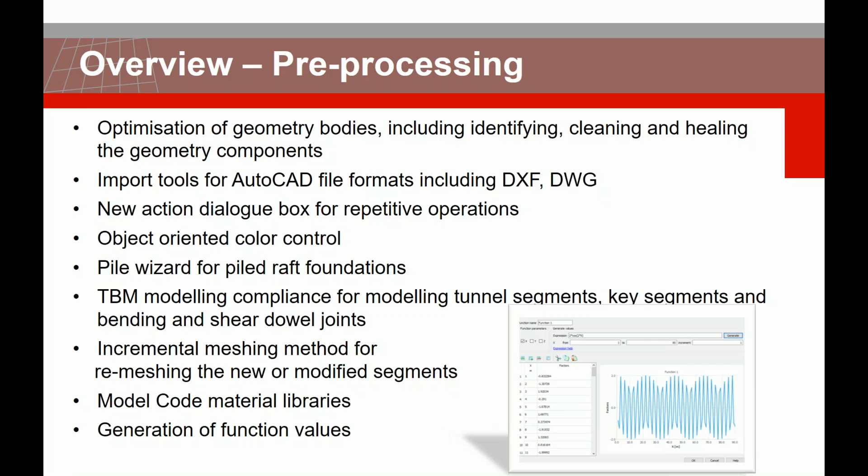The model code material library has been extended and made more interactive in terms of the definitions. The function values dialog box that we had for the definition of values and corresponding functions has now become more interactive, with some predefined arithmetic functions and other predefined settings.

With respect to the kernel, we have many developments; this is basically just the tip of the iceberg. I can briefly mention here the new work procedure for the definition of construction stages. This is very in line and very straightforward, especially with geotechnical applications, in order to easily define the model.

In order to easily define the model, control the sequence of construction stage, the active parts, the deactive parts, and also with respect to variation of the water level, change of the phreatic surface. Mixture analysis also, we optimized the implementation that we had in Diana in order to make it more interactive and easy to use by everyone to be able to perform the coupled flow stress analysis.

For those who are dealing with the dynamic analysis, we have a new feature that helps to convert the distributed loads to the basic dynamic mass. The hydrostatic load we incorporated with the time function. That means you can now nicely combine with one operation the impounding and dewatering process in time and the impact and effect of that on a hydrostatic load.

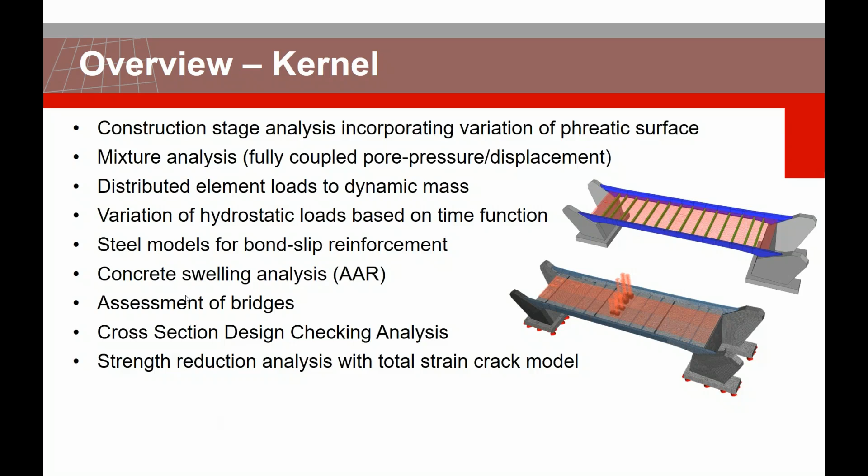And also with respect to the post-processing, we have enhanced the speed of the data management, the representation of them, plus for different type of output, we have added additional output parameters like over-consolidation ratio, maximum shear strain, hydraulic gradient, and so on and so forth, that you can find more in detail from our documentation, but also I touch base on some of them during this webinar.

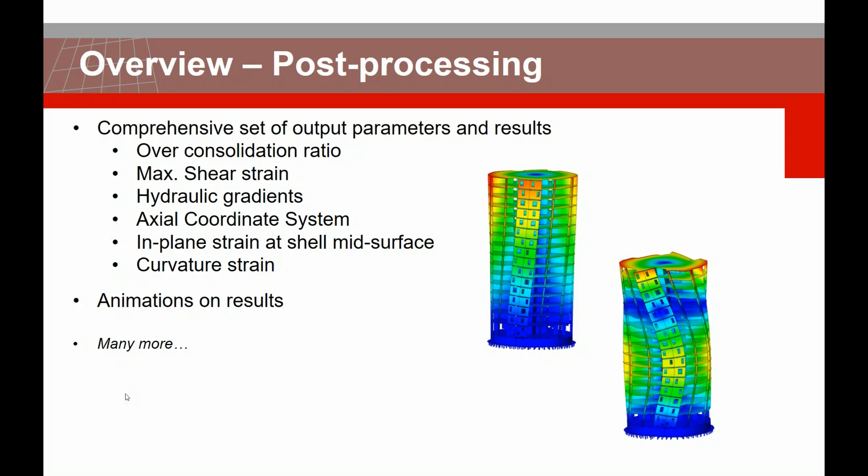So let's start with the healing process. We have incorporated one of the latest technology and the solutions offered in conjunction with Parasolid, this body shop, and we incorporated that in Diana along with our Parasolid engine for modeling to be compatible and very efficient and optimized in terms of the model definition and workability in the Diana environment,

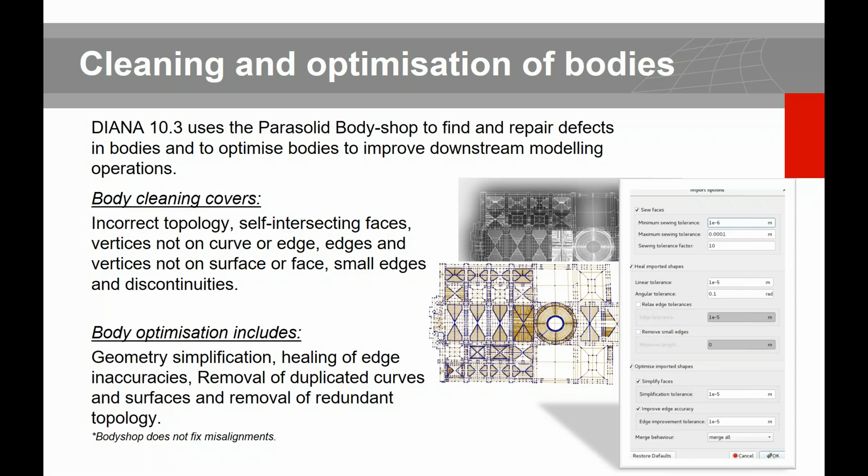For AutoCAD or import of DXF and DWG, similar to other features that we have, STEP, IGS, DXF, DWG, and IFC. You can import DXF and DWG, and our import feature covers all the earlier versions from release 14 (1997) up to now. And also all the geometry entities can be imported. However, you need to be aware that if you have some entities like text, hatch, light, these are not imported in your Diana model, because they don't have any structural value. They are just

drawing and explanation entities. Another thing that you have is the layers in the AutoCAD model, and you can import AutoCAD layers based on the various shapes that we have and under the different sets, so you can activate and deactivate all those things in a sequence.

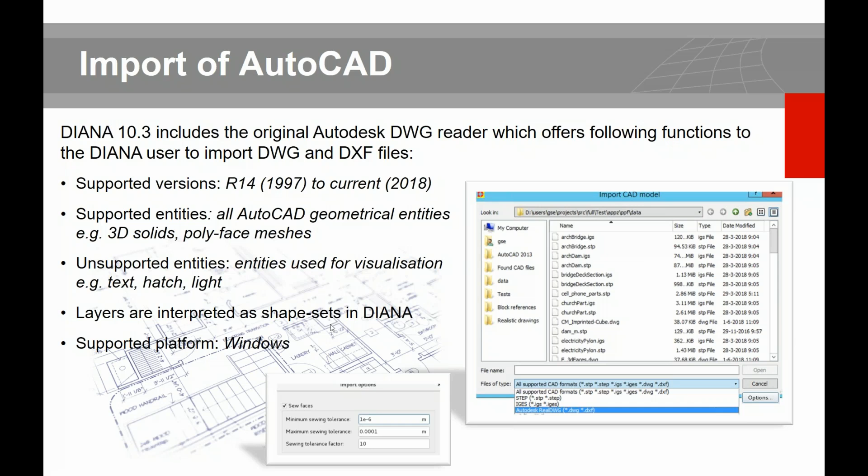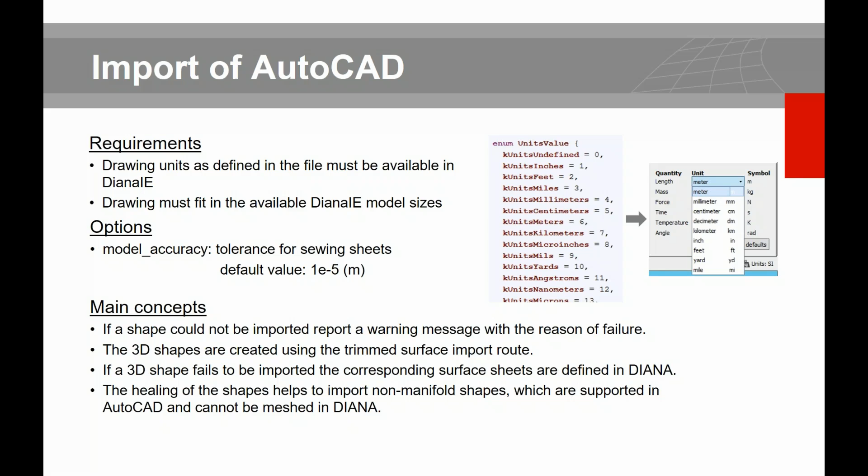Some of the recommendations that you may need to consider when you're importing CAD is the definition of the unit, so the unit that the model is defined in and the hosting unit in Diana that you want to import into. And also make sure that the size of your model is matching with the bounding box of the Parasolid that you import in Diana. So these are some tips that you may need to consider when you want to bring and import some DXF or DWG into Diana.

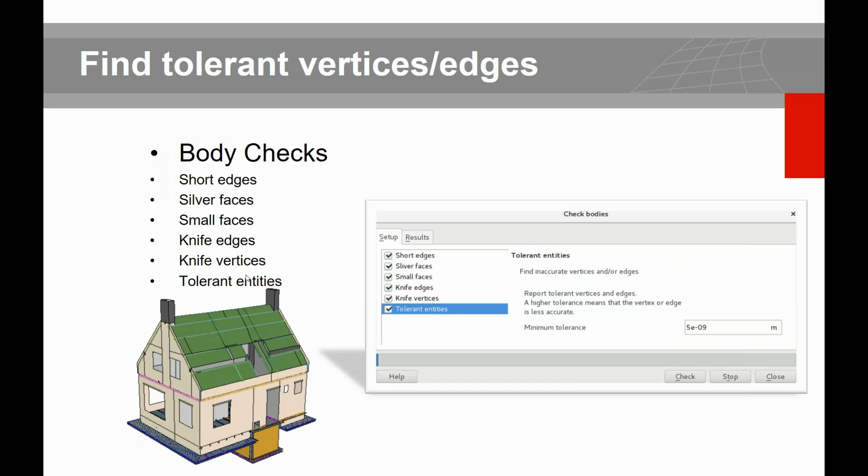With respect to checking the bodies when you import, we have added additional features that can be easily identified. So we have short edge, sliver face, small face, knife edge, knife vertices, and tolerant entities. Based on the selected items, you can choose DIANA to go through your whole model and it automatically flags and identifies any of these problems that you may have in your model. Based on those issues you can decide: I'm going to do optimization, I'm going to do cleaning, or I'm going to define the right strategy for the healing process in my model.

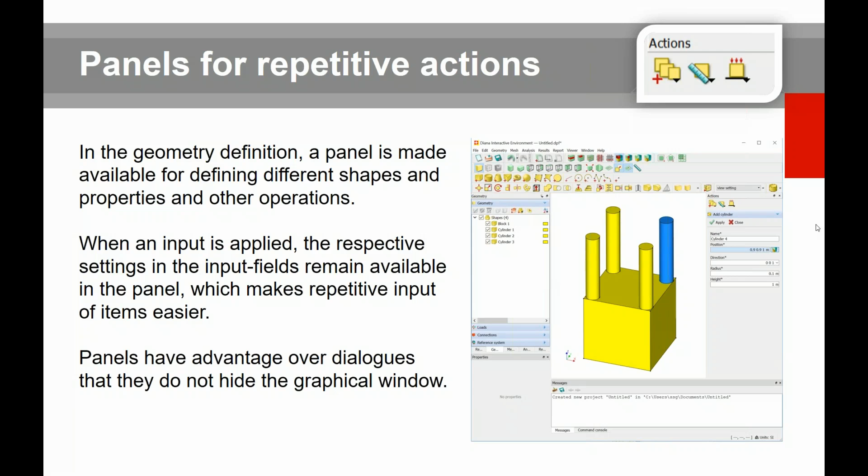So with respect to repetitive operations, as I mentioned, we have a new action box. When you select one operation in terms of creation, modification, adding, removing, all those things, a dialog box opens in your DIANA environment, and you can repeat this process by clicking on apply, and when the operation is over and you want to go for another type of operation, you can simply click on close. So this way you don't need to always go to the main menu and recall the same operation and the information. So this is very nice and helps you to speed up your modeling process.

The object-oriented color control, as I mentioned earlier, is very nice because you can assign different colors to different types of shapes that we have. For instance, we have a cylinder, we have a cube, we have a face. Each of these are different entities, therefore they can be represented with different colors. You can assign the material, and the colors represent the material. Here, for instance, the two sheets carry the same material, so both of them are gray, but the cube and the cylinder carry different material properties.

The type of body: the cylinder and cube are both solid, but these two sheets are faces, so you can identify in your model what objects you have, all the solids, all the edges, all the faces. You can identify them with color, and this is a very powerful feature.

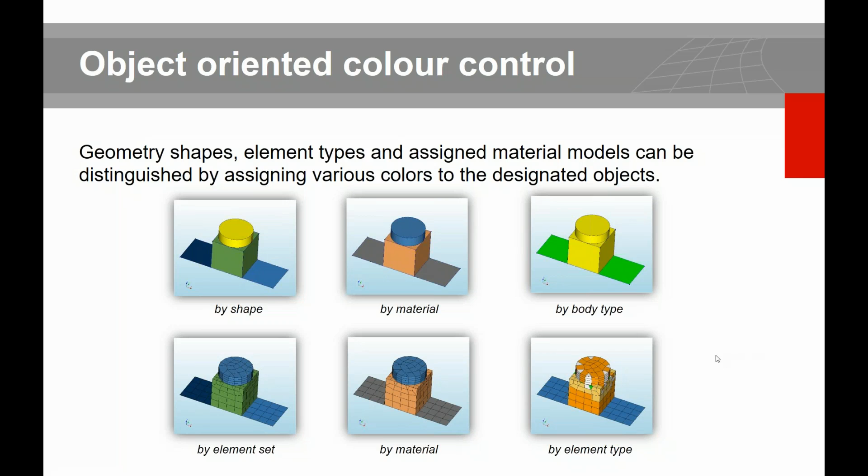Similarly, at the mesh level, you can identify them by the element set. So you have different element sets per geometry, per shape that you had. You can also show different colors for the material, similar to the geometry level. And this is very nice because you can identify various element topologies, such as wedge, tetrahedron, brick, or hexa. This helps you if you're doing some sort of nonlinear analysis and some localization is occurring in your model; you can identify if this is because of a bad shape element or because of real failure at the material level. So you can easily identify what type of elements you have in your model with the color representation.

Incremental meshing is becoming very powerful and very useful in order to save time, especially if you have a complex model, complex geometry, and you need to do some modification at a certain part, corner or segment of your model. In that case, when you want to remesh the model and update the information before the analysis, it automatically recognizes only the part that is modified. Therefore, it doesn't touch the whole model in terms of meshing. It only remeshes the modified part and adjacent segments or geometries. This is very powerful in terms of saving your time rather than remeshing the whole model.

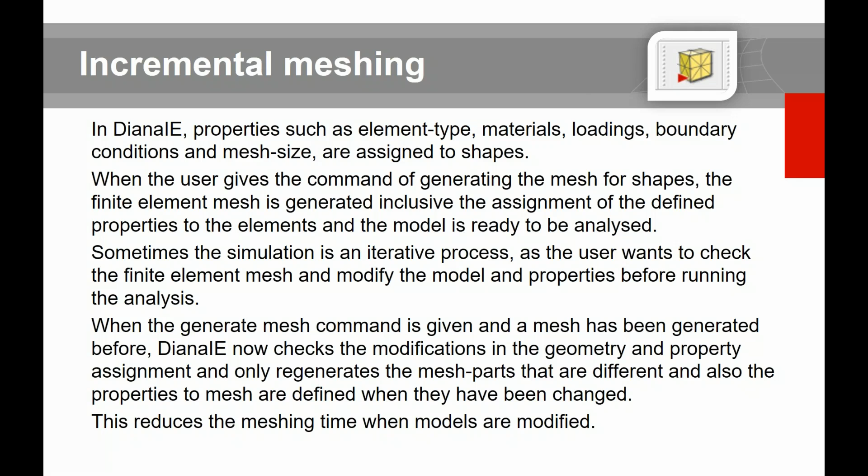The model code material input is a very nice feature, because we defined the safety factor earlier at the material level. So in the model code, you could define some factors of safety, and those factors of safety were applied to the corresponding material properties. But now, if you have a complex model with different types of material properties, we allow our users to define this safety factor at the model level. Therefore, these factors of safety are applied to all the model codes that we have listed here.

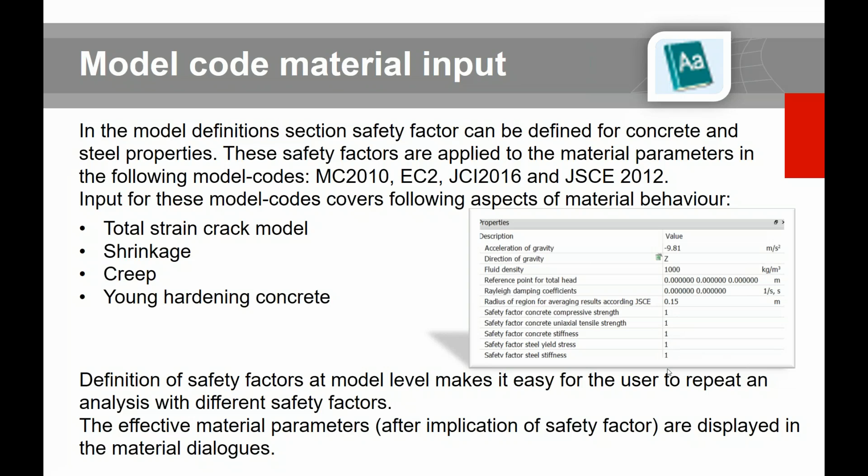These parameters also affect the associated parts with respect to total strain, shrinkage, creep, and hardening types of analysis, and we incorporated additional information in the model code with respect to these behaviors. So this factor of safety is very important. For ease of use, you can define it at the model definition, easily set up the factor of safety parameters here, and then it applies over the whole model.

Moreover, for the materials which are time or maturity dependent, we have this icon here. So based on the selected model code, you can click on this icon and you can see the evolution of these material properties in maturity or in time or whatever we have in terms of the reference input in a corresponding dialog box. And this is very nice and interactive in terms of checking if this is exactly what you want to consider in your model or not.

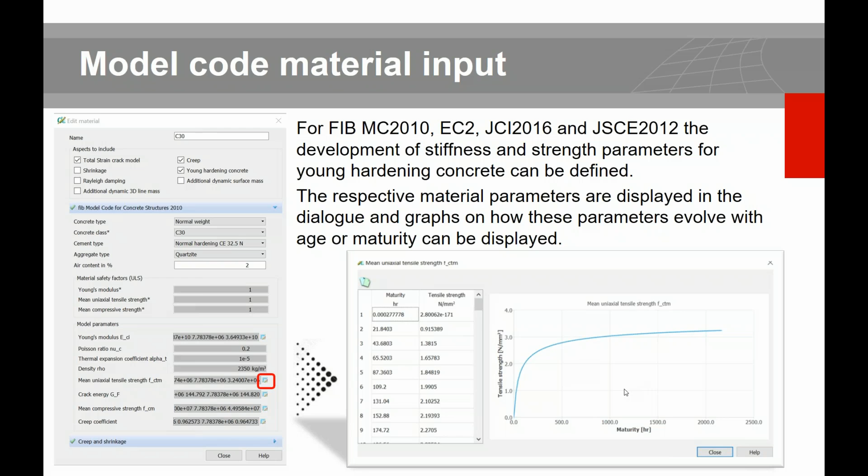Earlier, when we were doing heat of hydration analysis, we were defining the adiabatic curve either based on the user input or based on the degree of reaction. But now we also made it available to consider that based on the element age, and this helps to get similar input to what, for instance, some of the model codes are recommending.

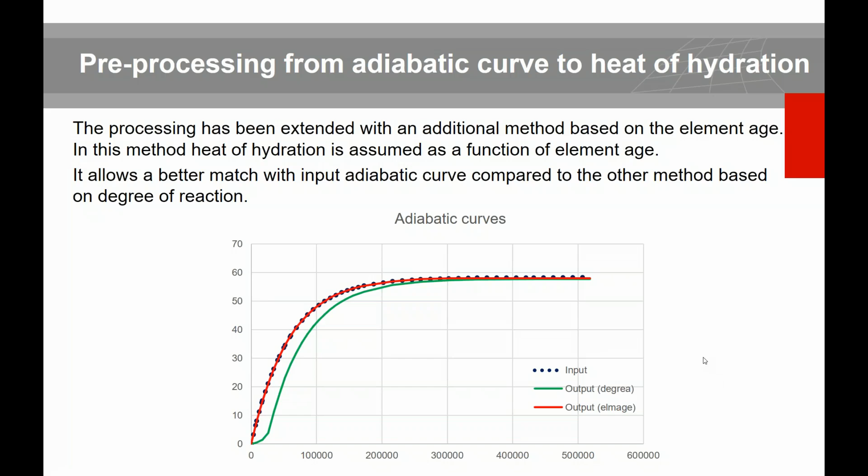So in some types of analysis, you may have this type of S-curve, but in some model codes, they don't consider this S-curve and they start from 0. So in both cases, now DIANA offers a solution for you, and you can use this definition in the adiabatic curve and assign it to your model for better or more accurate analysis with reference to the model code or the analysis that you want to consider.

For the generation of functions, as I mentioned, now you can write your own function here in the corresponding expression, corresponding input file. Arithmetic functions are available. Different types of units can be considered. And also there are some predefined functions that you can directly define, define the corresponding input, use that in the analysis and assign it to your load, boundary conditions, or other types of variables that you have. This is very useful. It will speed up your process.

So rather than defining all these values in Excel, copy, paste, if you know, for instance, the sequence of your impact or the loading sequence, you can consider the function and then the program automatically generates all the required data for you.

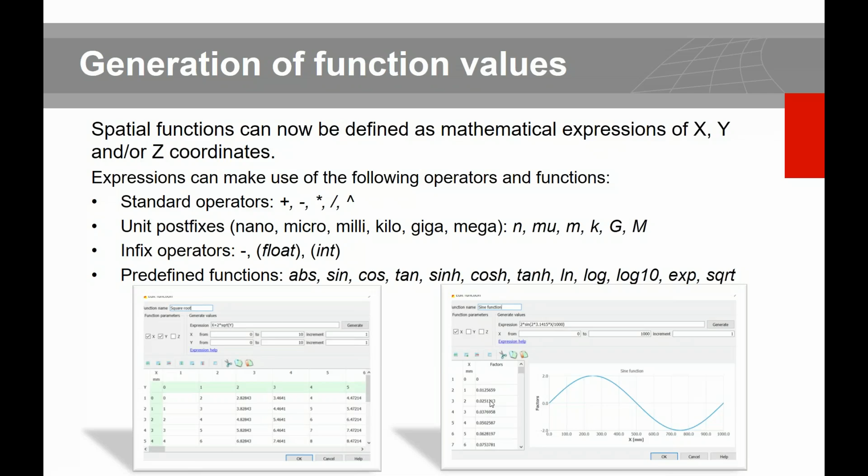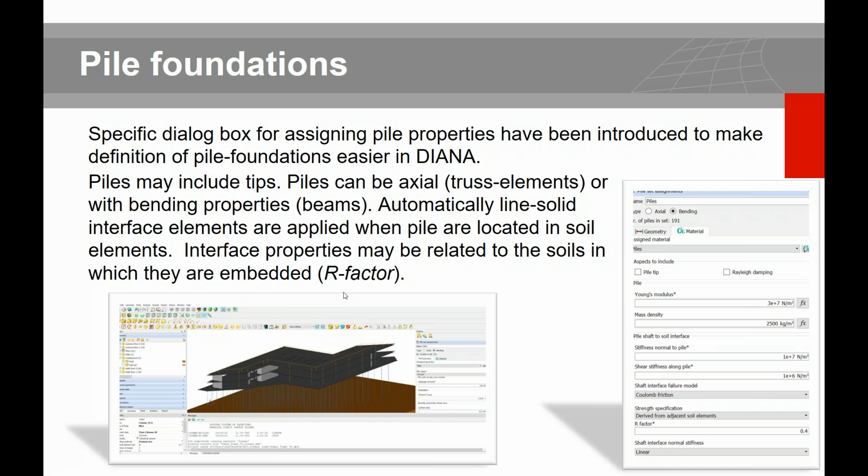So here you can see any complex models can be easily selected based on the different pile sets. So you can group the piles, get the output separately, manipulate them separately, assign properties to them, and use drag and drop into those sets. So it's very intuitive, very useful, and in terms of the output it's very intuitive. All the information can be derived at the push of a button and you can take benefit of that with respect to your large model.

Needless to mention, we are the first group who delivered this concept as an embedded element. That means we are using the same technique in pile definition, and you don't need to have any nodal connectivity when you're defining your pile with respect to the soil model. So here you can see the blocks of the soil are coarse, but the piles are easily going through without any nodal connectivity.

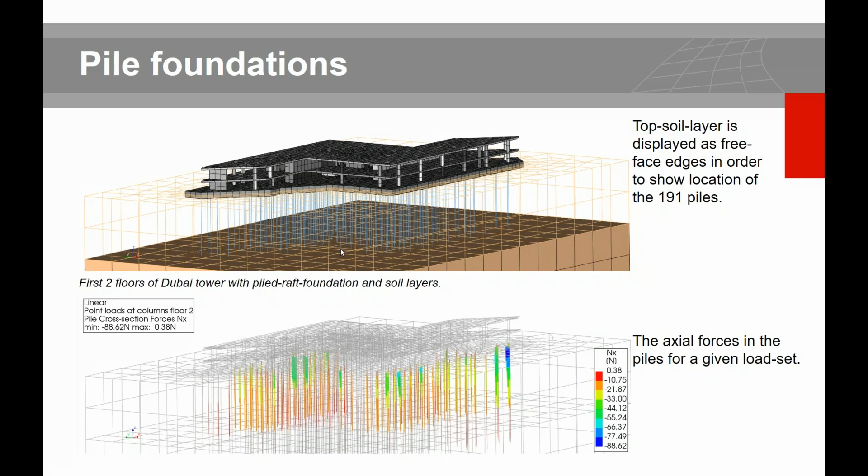For tunnel lining and TBM, I think you may have already guessed, but we emphasized a lot with respect to ease of the workflow and enhancing the workflow for geotechnical applications. You can see this implementation and illustration in these slides, more towards geotechnical and tunneling applications, but I'm sure you can take benefit of that in other aspects and applications as well.

When dealing with TBM tunneling, one of the key factors is the stability of the tunnel segments: how they are aligned in a ring and how they interact with the next ring or adjacent rings in the model. One characteristic we have is that we modeled this lining based on shell elements, and we simulate this interaction based on the line interface.

This line interface, we introduce either Coulomb friction or in combination with the Janssen law to capture nonlinear bending. In terms of the sequence of modeling, you can easily define this sequence of the line interface within the ring, to model the shear dowels, and also the adjacent interface between the rings.

Further on, you can consider the interface between your liner and the rock mass. So you have two different layers of interface: a surface interface between your lining and the rock mass, and also a series of line interfaces between the tunnel segments and adjacent rings.

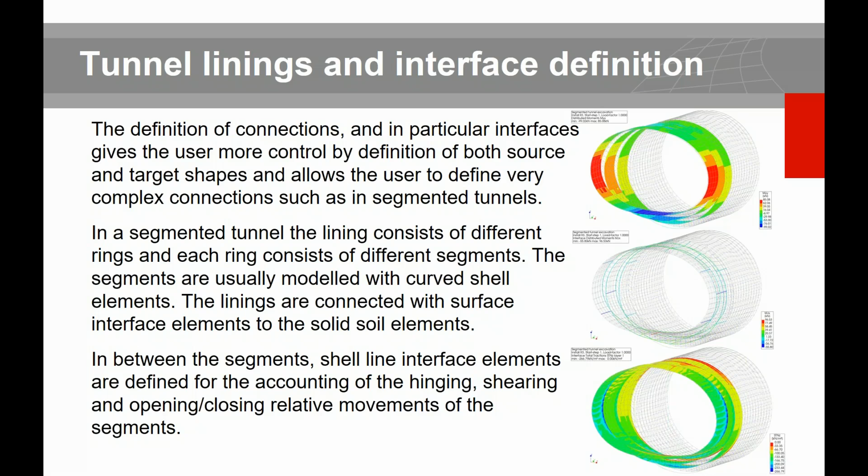As I mentioned, we came with a very interactive, user-friendly, and streamlined workflow, and we call it stage construction analysis, that helps you define the impact or effect of the variation of water in a construction stage in DIANA.

This is important because water management is always one of the key factors in geotechnical applications, and the user needs the freedom of introducing this variation of water level or different phreatic surfaces. It should be easy to set that up and easy to change and combine with other stress analysis.

These scenarios could be: when there is no influential water level; when there is a water level and we're simply dealing with dry density and saturated density; when there is a water level and we're talking about steady state; and when there is a water level with changing water level, and we're talking about transient analysis. All these sequences can be easily and nicely introduced and processed in this new stage construction analysis.

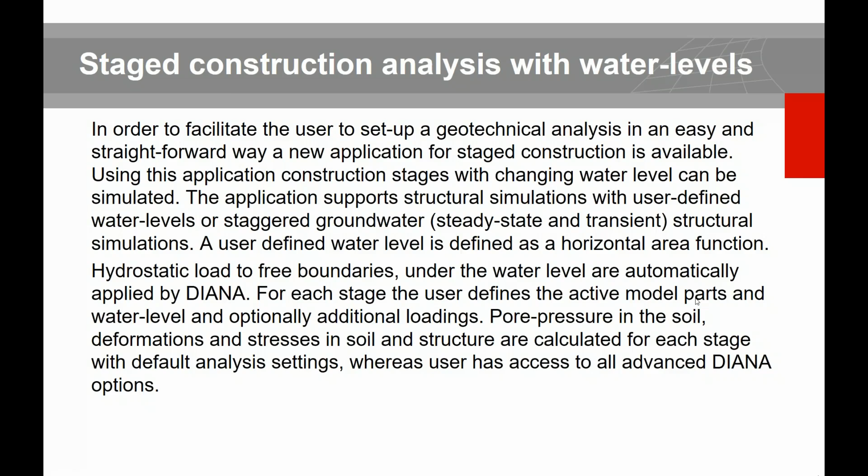There are a couple of new tutorials available on our website. You can easily refer to them, and we can always help you address your possible questions.

Here is a simple cut and cover tunnel. In the state of initialization, the hydraulic gradients, water levels, and pore pressures in the first phase are illustrated here in this column.

Then we have the excavation process, including dewatering, so you can see the water level changing. In the next stage, we activate our structural tunnel or the culvert, and then we see the stress variation by adding the extra weight on the model. Then we cover the top of the tunnel and start to release the water.

You can see this process in this direction in terms of construction stage, and in this direction in terms of different impact and results in DIANA. It's a very useful tool, very easy to set up, and we can illustrate that by means of different tutorials we have, so you can easily find your way and acknowledge this new improvement, especially for our clients and prospects involved with geotechnical applications.

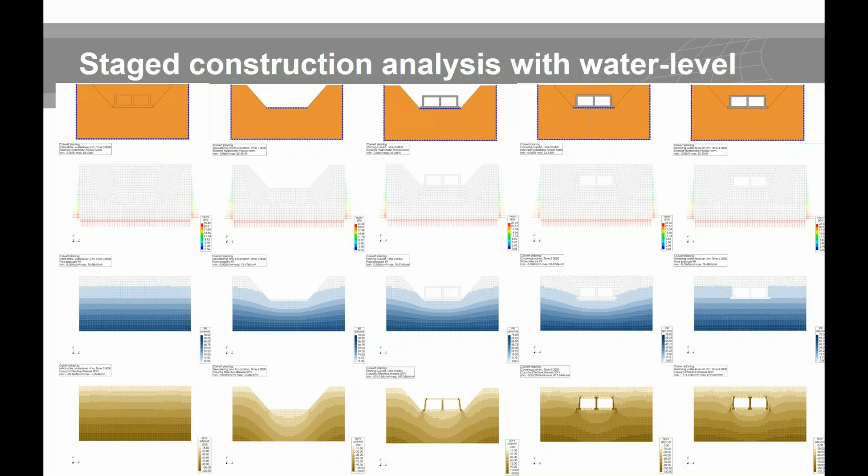The mixture analysis, as I mentioned, is one of the powerful capabilities of DIANA, but we made it very user-friendly and more interactive. When going for a fully coupled analysis, that's the PU formulation, pore pressure and displacement fully coupled, you are required to define more parameters at the material level.

Therefore, in order to manage the project and control the input parameters, when you define a new project, we made a new setup, and that's mixture analysis. So when you click on this, those additional parameters become active.

Therefore, you're required to put different input with respect to porosity, saturation, and information associated with the water and the porosity and the void in the soil.

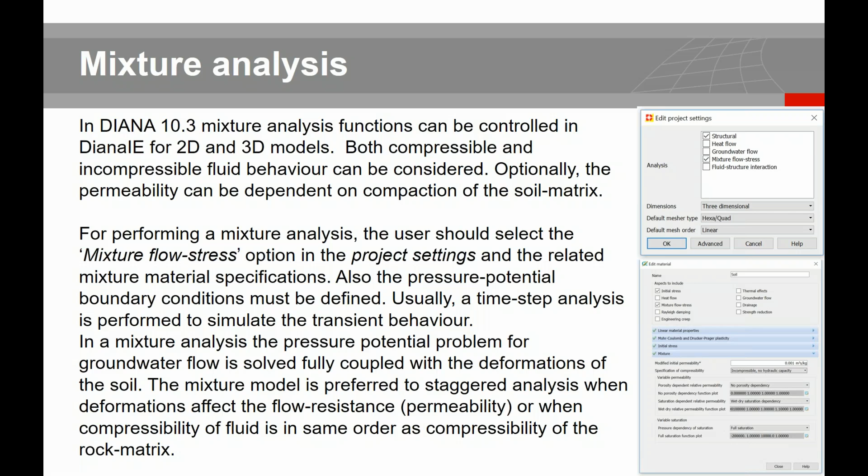As I mentioned, when you change the water level, this change in water causes some sort of deformation. With the deformation, again, you have an extra impact and effect on the porosity, and the water will be seeping in a different manner. So it's a fully coupled approach, and it's a very nice solution that you can incorporate with, for instance, embankments, levees, and consolidation.

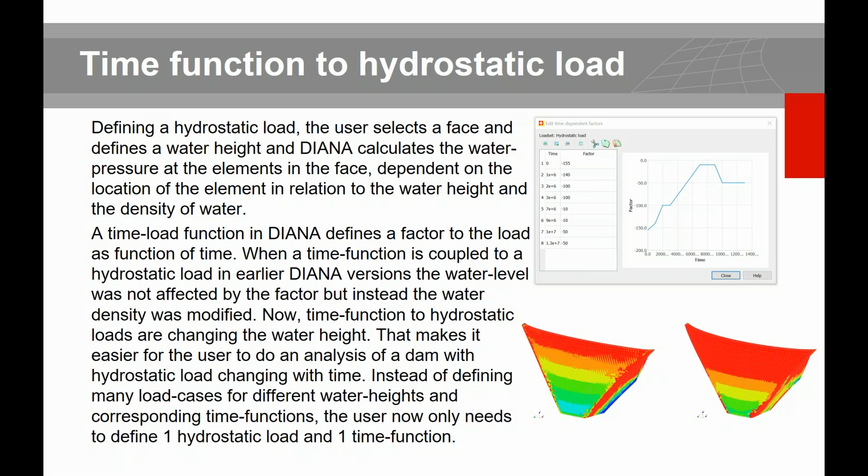One of the powerful features we offer here, because DIANA is one of the pioneers in delivering solutions for all types of dams and dikes. This was always one of the challenges, and now we have a solution with respect to variation of the hydrostatic pressure in time. This means you can mimic the whole process of impounding and rapid drawdown, or increasing or variation of water level in season, in time, so you can consider at the same time the hydrostatic impact and effect of those aspects on your model.

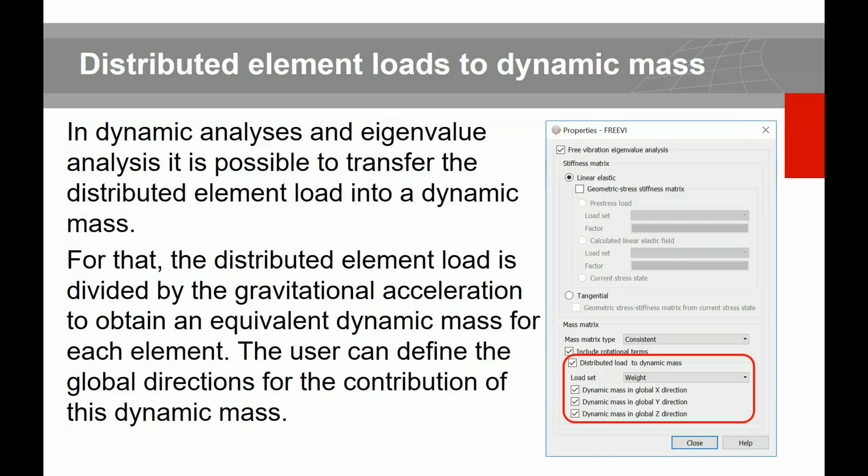With respect to distribution of the uniform load, when you perform dynamic analysis, you can transfer that to dynamic mass, and incorporate it in one of the directions or all directions, and use it in conjunction with the mass of the model. This is when you want to basically transfer a static model to a dynamic model. You can use and take benefit of this feature in Diana.

Concrete swelling is a very common issue for people dealing with concrete, which is subject to some sort of water seeping and the impact and influence of the alkali aggregate reaction, or the cement or chemical effect from the cement, introducing some sort of anisotropic strain or deformation in the model. So we have incorporated this user-supplied subroutine, but with an interactive user interface, to mimic this behavior, and as a result you can get the rate of swelling strain in the model as the model goes through the time, or the process of the transient analysis.

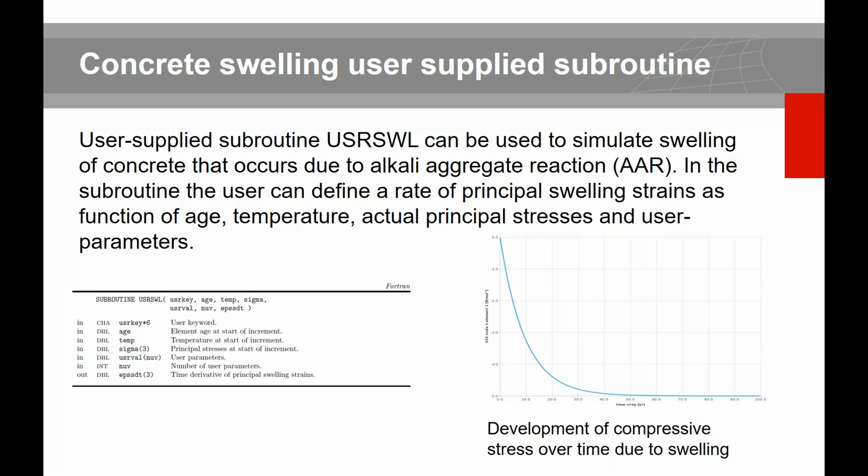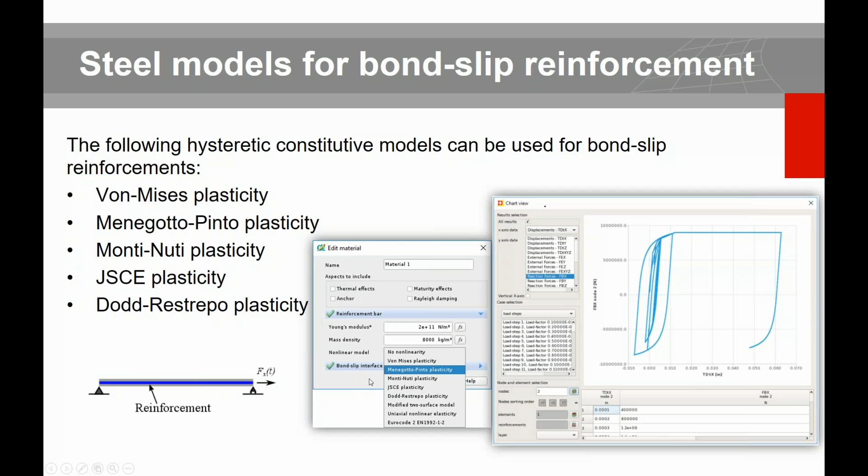Further on, with respect to our embedded elements, especially with some sort of energy dependency, we incorporated bond slip effect as well. Therefore, now you can use bond slip reinforcement not only for von Mises plasticity, but also for Menegotto-Pinto, Monti-Nuti, based on the Japanese Society of Civil Engineering plasticity, and Dodd-Restrepo, regarding the combination of these two effects in the model - embedded element and bond slip effect.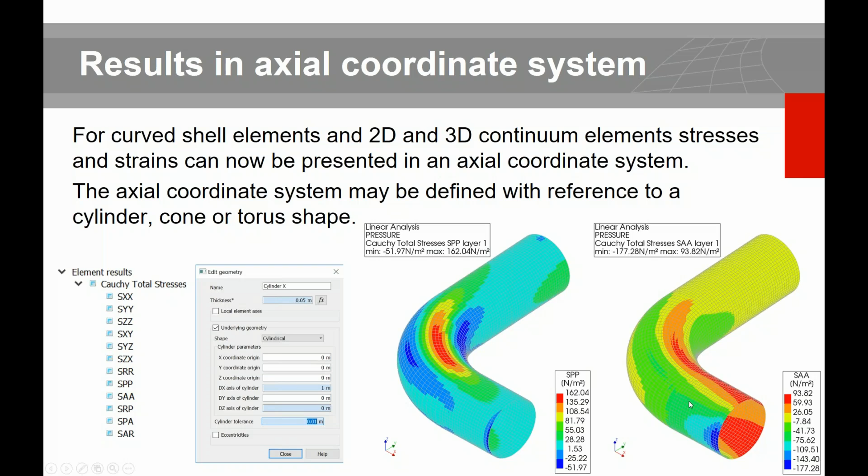I'll touch on two more slides, then hand over the presentation to Ab. The first one is that it's now possible to define a cylindrical coordinate system independently for different parts of your model, in order to extract results based on axial, radial, and theta directions. So all that information can be derived now based on the reference coordinate system that you define at the geometry level for different parts of your model, and you can extract the results independently in the model.

The next one is the embedded animation generator. This is also a very nice and powerful feature that helps you generate animation not only for one case, but also for all the results history that you have. This function works with all types of outputs we have, whether load steps or time steps. You can create the animation, store pictures of different time steps, and control the frames and cycle of them if you want to present it and show it to your clients.

So Ab, I'm going to make you presenter, if you have your presentation ready.

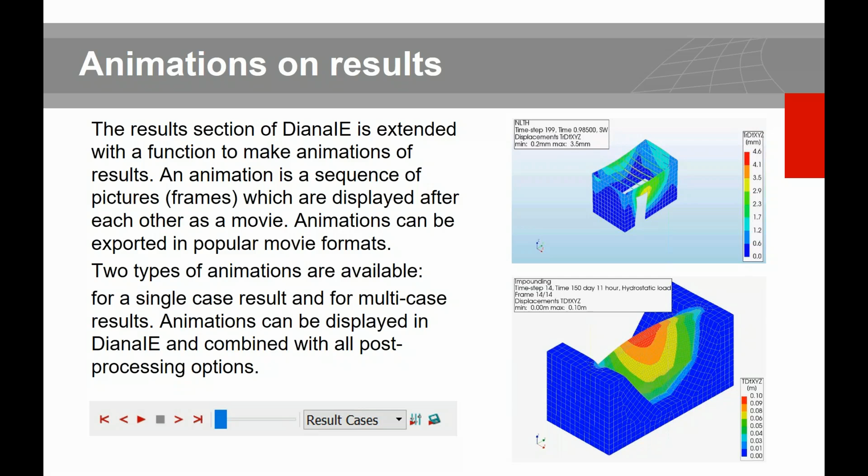I want to explain a little bit about the new feature of assessment of bridges. And where there is assessment of bridges, you could also read assessment of structures, because we incorporated this mainly for bridges, as all over the world authorities are dealing with bridges that are overloaded by traffic increase and deterioration of materials. But the same method can also be used for normal structures, non-bridges. So we made a new calculation analysis feature called star design.

In design, you can implement cross-sectional analysis based on a nonlinear analysis to calculate the capacity. And for bridges, you can add loads like UDL loads or a traffic set of loads, where you have the actions. If you combine the actions against the resistance, you can get a unity check.

So it's an extended functionality because all the loads are based on the Eurocode description of UDLs and tandem traffic. On top of that, with this new feature, we can calculate all the bending moments and shear forces, and we can average them in a certain way I'm going to describe, and shift them according to the Eurocode.

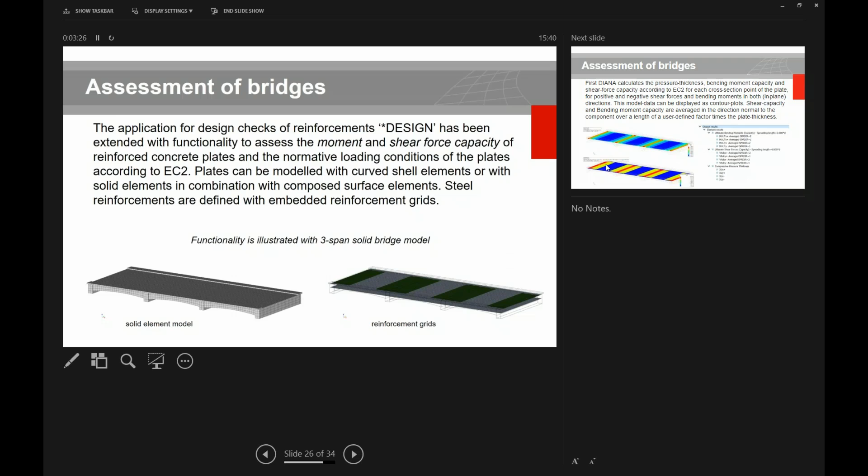If you go to the next slide, there we see the capacity displayed, where Diana can calculate the bending moments in two directions. So we have the plus and minus, and the X and Y direction.

We can show as model data, here on the left side - it's very small - the compressive length, the XU, the height of the compressive zone, and we can show the averaged capacity of the bending moments. That is model data based on the input of the thickness of the structure, the material of the concrete, and the amount of reinforcement you have.

You can do this cross-sectional analysis in two ways, with or without the tension capacity of the concrete. According to the model code, you leave out the tension capacity, but if you have a hybrid structure like added steel fibers, then you can turn the concrete tension on, and it will take that into account.

It is important to highlight the averaging item, because if we look at the bending moment, for instance in the X direction, we may average in the Y direction over a length of 2 times the height, 2 times the lever arm. You can change this factor of 2 if you like, but the default setting is 2. For the shear forces, we may spread the shear forces in each integration point over 4 times the height of the structure.

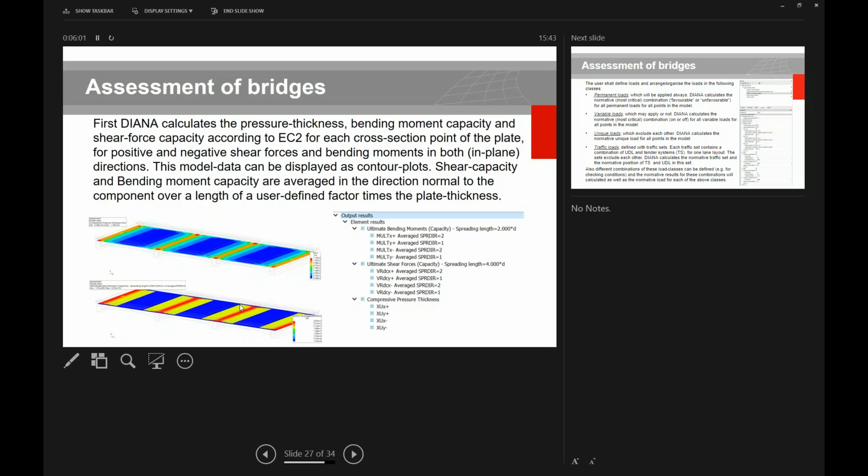That is in the perpendicular direction of the action. In the direction of the action, the Eurocode prescribes that we need to shift the bending moments over a length of the height of the structure. So for instance, this bending moment will be shifted to the left and to the right by the height of the structure. It's done fully automatic.

The loads acting on your structure are now divided into permanent loads, variable loads, unique loads, and traffic loads. The permanent loads will always be there, for instance the dead weight of your structure, the asphalt layer on top, and all these kinds of loads. They commonly have 2 sets.

It's on or off, so favorable or unfavorable. If they work favorable, we need to multiply them with the safety factor, and if they are unfavorable, we multiply them with a higher safety factor. So if favorable, for instance times 0.9, 90%, and if unfavorable, then times 1.2. This works for all the permanent loads in the model.

Then we have variable loads, where they can be on your model or not. So for instance common traffic UDL, or another variable load - you can also think of buildings or other structures where the load can be on or off. Diana adds the load cases automatically with the on or off check.

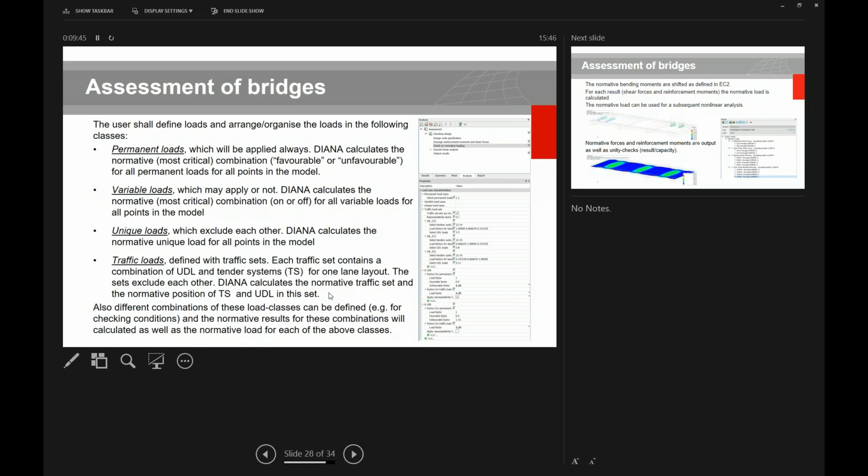If you have a sectional approach, like in this picture, we have a compression in the concrete, a tension in the steel, and we can check on or off the tension in the concrete if you have steel fibers or another type of tension capacity. And what is done is that we increase the curvature of the model in small steps. And with each curvature, we take equilibrium with the compression and the tension forces. And if we have equilibrium, we are able to calculate the bending moment.

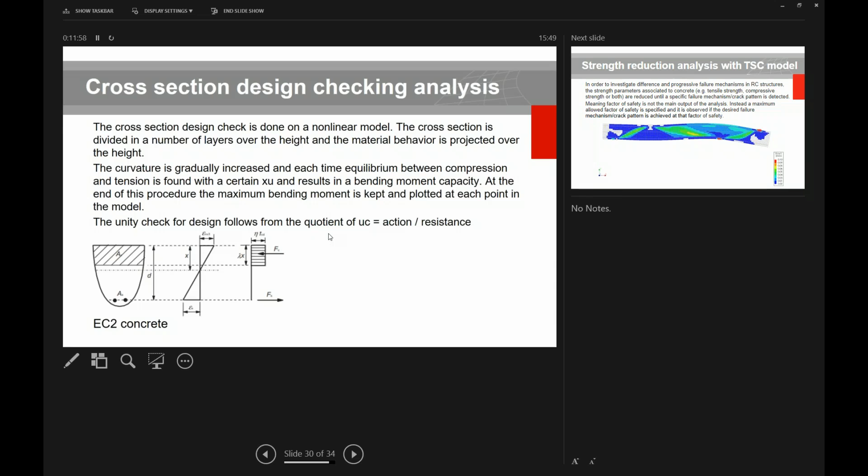Then we increase the curvature again, and we get a new bending moment that probably is increasing up to a certain curvature where we find a maximum bending moment, then it's lowering again. That maximum bending moment is stored, and if we have that maximum bending moment and we get the action from all the load cases that are prescribed before in this presentation, then we can divide them on each other and we get a unity check. If the unity check is lower than 1, it is okay. If it's higher, we need to add either concrete construction height or extra reinforcement, or in case of an existing viaduct, we can add, for instance, carbon layers or something else to strengthen the construction.

So on this slide, you are able to see the unity check where the acting load is divided by the resistance capacity. And that can be either the bending moments or the shear forces. So in this way, we can automatically check a complete bridge for the Eurocode load combinations in a very handy manner. But this way of analyzing can be also projected on other types of constructions.

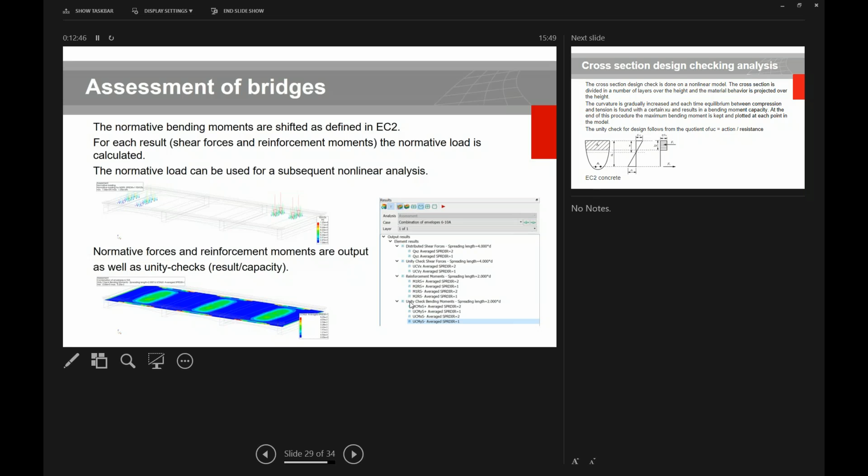Then the last feature we added in Diana is the strength reduction analysis for a total strain crack model. The strength reduction analysis is already well known in the geotechnical approaches, where it's called the phi-C reduction. We reduce the phi and the cohesion, and then a failure plane, slide plane can occur. It's a kind of safety.

In the total strain crack model, we implemented it because if we look at a type of failures, you can have, for instance, a bending failure in this beam where we have two supports over here, and a loading over there and over there. And depending on the amount of bending reinforcement, you will get first bending cracks to a certain level. And if that is your load level for the ULS, you can say, well, my construction is safe, but you are not sure whether you're very close to a shear failure or not.

By adding the strength reduction analysis to your ULS load, Diana will reduce the tensile strength and/or the compressive strength in the model in steps. And at each reduction level, we get a new state of equilibrium with probably wider cracks and maybe a shifting of the crack from a bending moment to a shear crack. And with this approach, we can see this factor of safety between your ULS state of cracking and your ultimate failure when the concrete material is a little bit less than expected in reality.